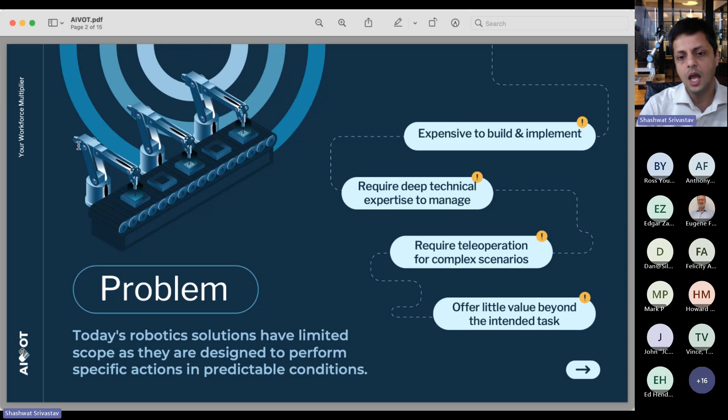If there's any change in requirements, like change in the workflow or the object that has to be manipulated, re-implementation has to be done for the automation. Often the workspace has to be modified too, so you have to bring in a conveyor belt and those types of things to make automation work. It's not flexible in that sense.

What we've done is built an integrated robotic end-to-end solution that can perform unstructured and complex tasks in dynamic and unpredictable environments. We've built a form factor which includes the hardware and software as an integrated thing, so it can just be deployed out-of-box by layperson operators and made to work in any situation.

However, the core value proposition that we have is in our software, the AI-based software, and the software itself is hardware agnostic. Basically, it can be made to work on any off-the-shelf third-party commercial robotic systems like industrial arms, cobots, AMRs, unmanned vehicles, and so forth.

The software works by integrating the configuration of the hardware, and then it's able to talk to the low-level motor commands with the hardware and bring in the overall intelligence to the system. We've shown a few examples of how that's done in our deployed systems, and I'll talk about that a bit too.

Let me interrupt here for just a second. Ed Hendricks, did you have something? It looked like you unmuted, did you have a question? No, I do not have a question. Okay, just wanted to check to make sure.

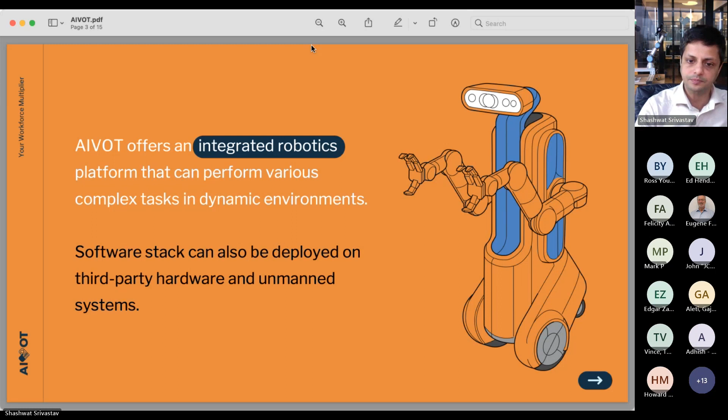So I'll dive a bit deeper into how the software system works. Basically, out of the box, it's a vision-based system, so it can detect and track objects in real time. It uses a variety of deep learning models inside the system as building blocks.

Out of the box, the robot comes pre-trained with identification of common objects, so it understands what a table, chair, glass, all these objects mean. It comes with a natural understanding of the language and description people use to define various tasks of a workflow. It also comes with an ability to perform basic everyday actions - like, what does lifting mean? What does grasping or placing something on top of another thing mean? How do those things work? So it has an understanding of the ability to manipulate rigid objects.

So basically, just out of the box, I can say to the robot: pick up the green box and place it inside the packet, and it would be able to do that. But oftentimes people have unique objects and tasks they want to automate. In that case, they can show the object to the robot and say, I'm going to teach you about this new object.

Let's say we want to measure the radioactivity level of something. We can say this is the object I want you to learn about, and show the object in front of the robot so it can see its shape and texture. Then you can say this is a special point on the object, and show that this is the button I want you to consider. You can name all these concepts - this is the start button, this is the measuring instrument - and also show it a pose, that to measure, you have to bring the object into this pose relative to another object, and it would understand that.

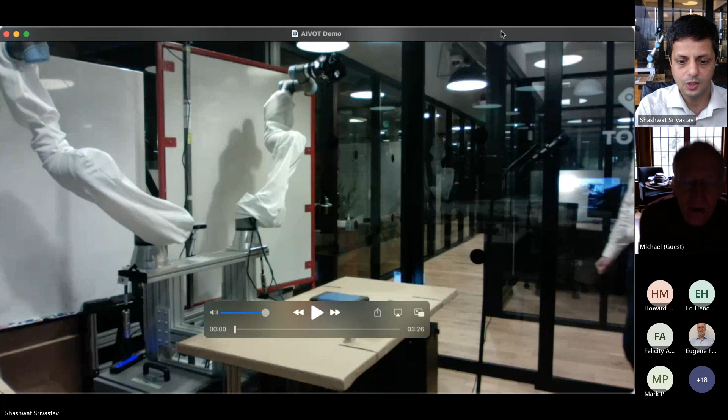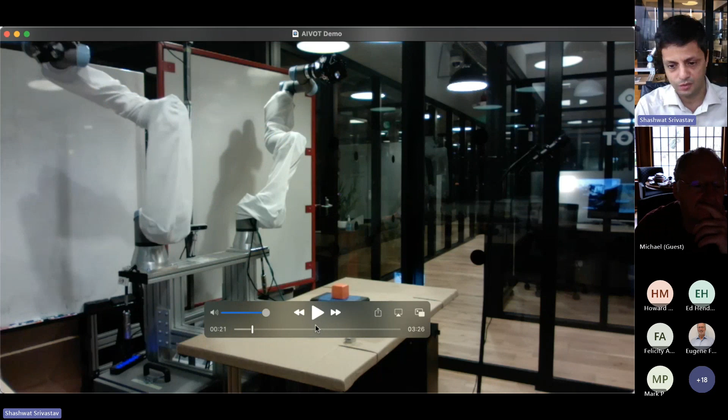So this was just a toy example recorded earlier to show the concept. This is out of the robot. It has no training on these objects, so it's just working off its common understanding of different things, and it's able to follow those instructions and perform those tasks. Between the spoken instructions and the action, there's a pause of 20-30 seconds while it processes and creates a plan. In this video, that pause is cut out.

That was an improvement: after picking up the orange cube, move it 10 centimeters to the right and 10 centimeters up before the next step. So the interaction is more conversational with the robot - you can give it feedback. If you use something the robot doesn't understand at all, it can say 'I don't understand this, can you explain?' And that's how you build up and refine the skill as it goes on.

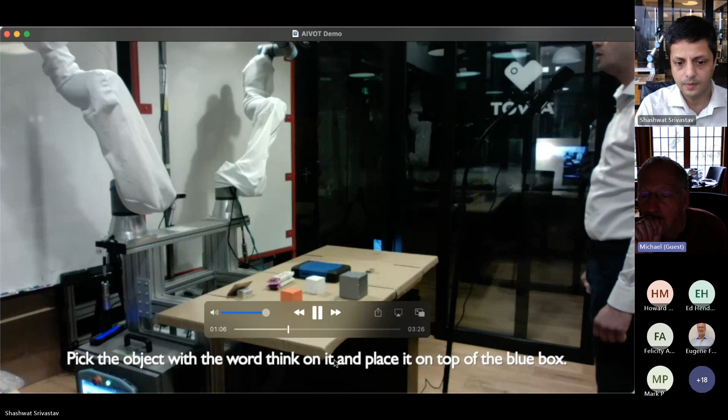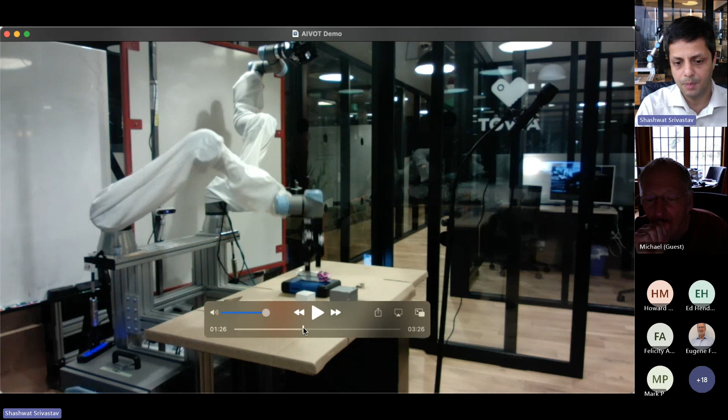Pick up the object with the word 'think' on it and place it on top of the blue box. Okay, it can - so this is a 'think' bar, but it can read the words and make sense out of it and take decisions on that basis too.

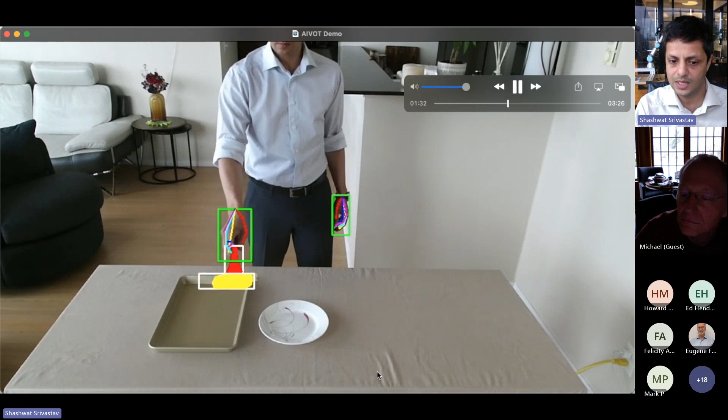The other thing I wanted to show was learning by demonstration - how you show the flow. Here the robot is tracking the human hand, and once it comes in contact with something and starts moving that object, it begins tracking that object that was moved. The robot has 3D cameras on it, so it can understand shape, pose, and those things too. If that object starts interacting with another object, it starts tracking those objects too, and in this way it builds up the whole context of the task that needs to be performed.

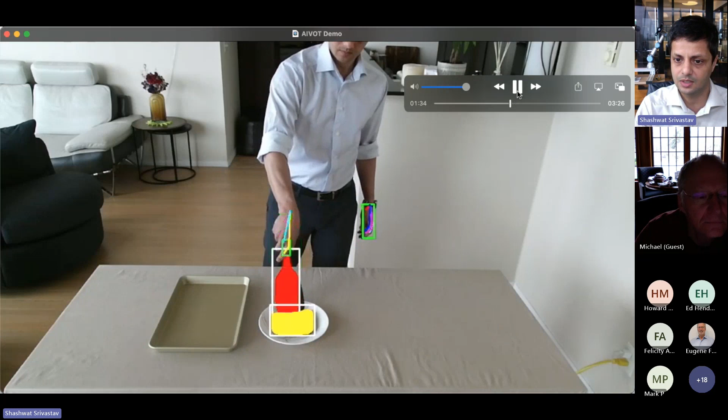Once that context is built up and it understands the task context, it can be given an environment where things are arranged differently, with other objects present, but it would still recognize the objects that were in the original task description, build up the context, and perform that action.

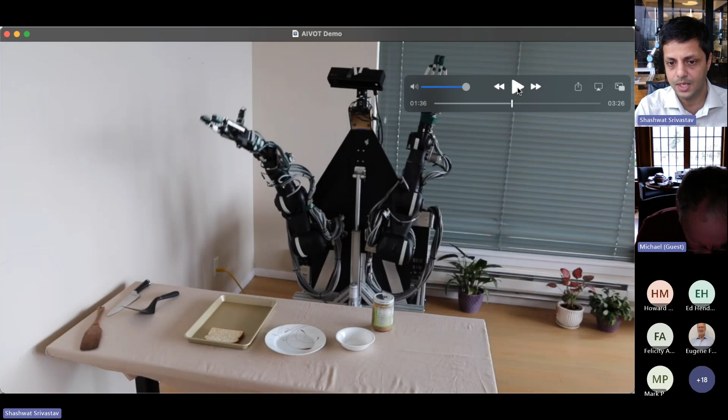This particular robot was a prototype that we had built earlier - this is our own hardware prototype. I'll talk about hardware later and explain why we built this robot. But as Eugene was mentioning, things can move around, and it can react to that on the fly and perform the action.

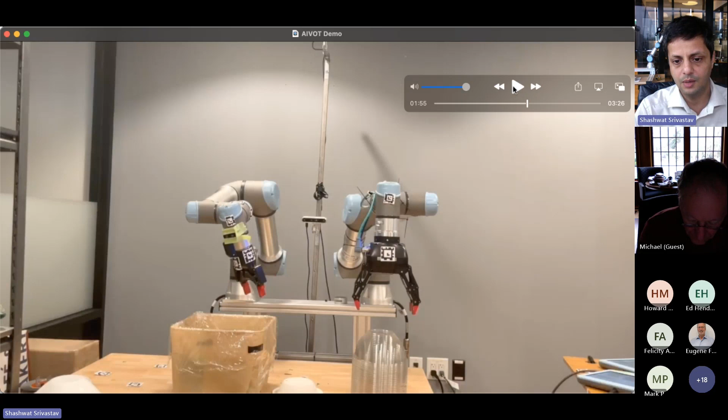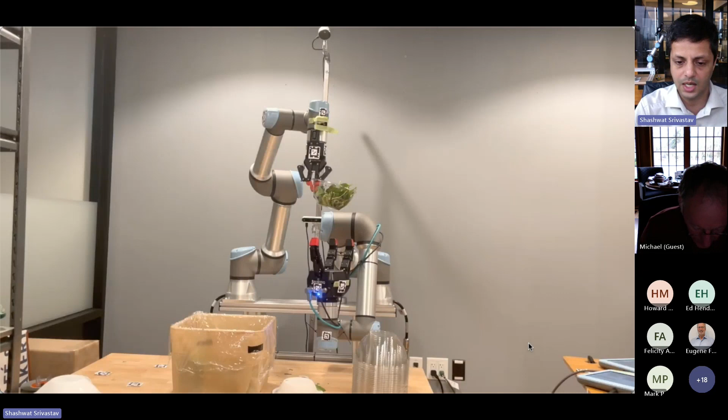Thank you. So we had deployed the robot in a commercial kitchen in the Pacific Northwest at Evergreens, a chain of 32 restaurants. They had to-go salad boxes, and the robot did a pilot to pack the to-go boxes, picking up bowls from a stack one by one and packing the greens into those bowls. It's completely unstructured - the stack of bowls moves as it's being manipulated, but the robot is still able to adjust to that, and humans pick up the bowl and arrange the toppings on top.

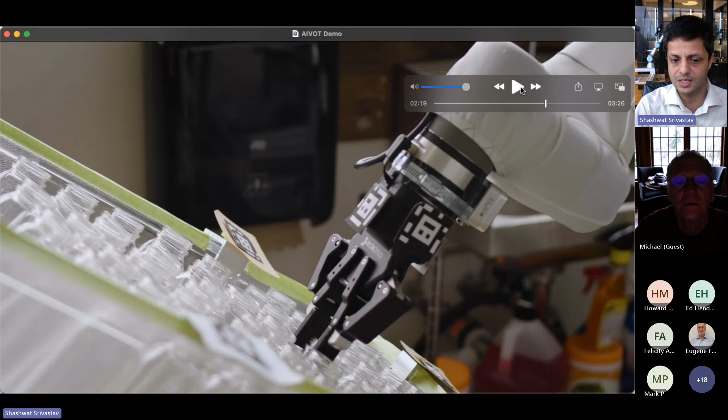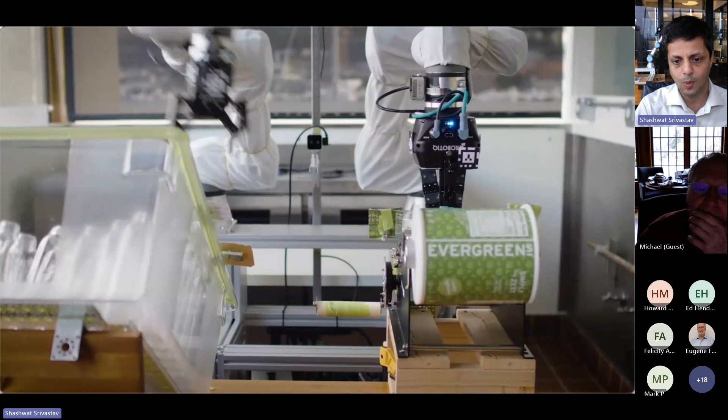Another task we automated for them was the production of beverage bottles. A person brings in a tray of bottles, which are all unstructured - if one bottle is picked up, others move. But the robot detects bottles and picks them one by one from the box, and uses the labeling machine to put the label on the bottle. This required some precise coordination for it to be able to do that, and it read the text on the label to know when to stop labeling.

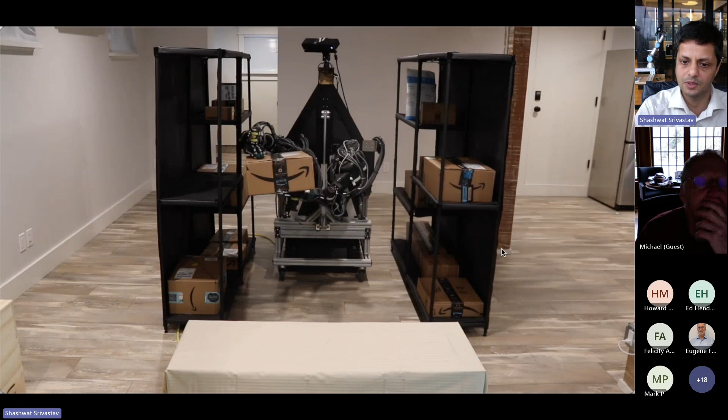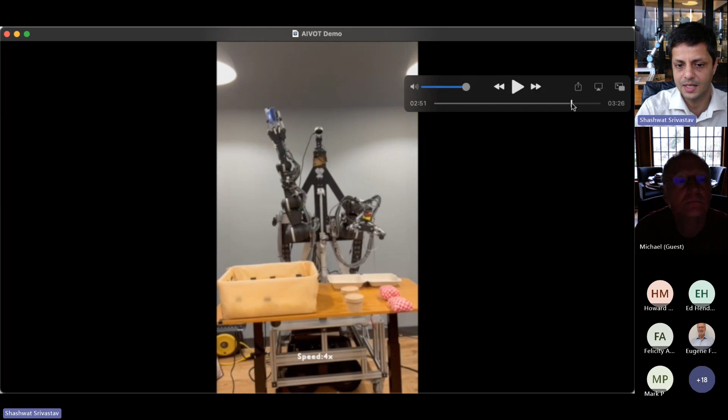Some other videos we've done are more of our demo videos inside our office to show the capability of the system itself, where it can go back and forth and fetch, pick up and move boxes. Sorry, that video was cut short, but in the original video on our website, you see it also goes back and forth and picks up different shapes and sizes of objects, like envelopes and small boxes. It's not a precise back-and-forth motion, but it's able to locate those objects and figure out how to pick them up and bring them to the front.

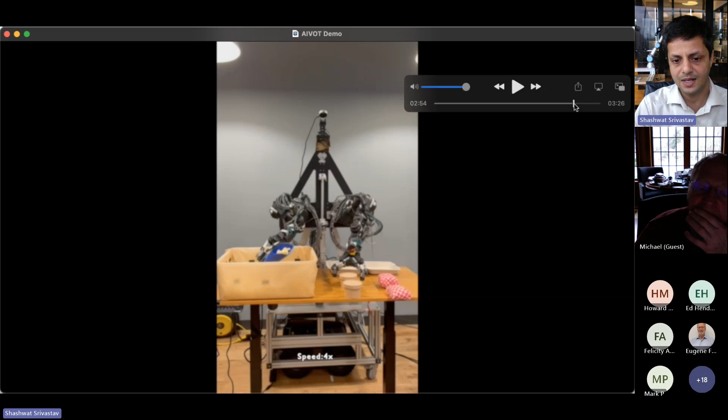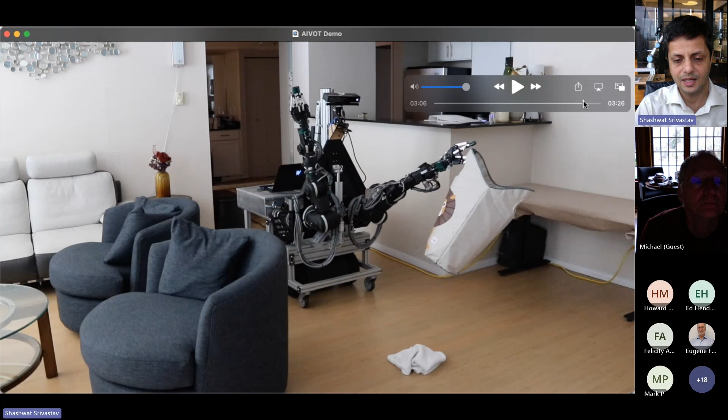We had done some other targets to do, like to-go boxes, packing, again to show the versatility. And this is an example where we said go along the floor and pick up the toys and put them in the bag, and it's able to explore and find objects on the floor and pick them up.

So are you using tactile sensors in the fingers to be able to prevent from crushing and sensing the objects that you're touching and grabbing? How are you handling that?

Yeah, so we haven't done that yet, but that is a plan. That is one of the things to integrate in these robots. Basically what we do right now is we have various multiple levels of force, and the operator can say start with the light grasp, or this object is heavy, use a tighter grasp. So we require more operator input right now, but that is in the plans to develop.

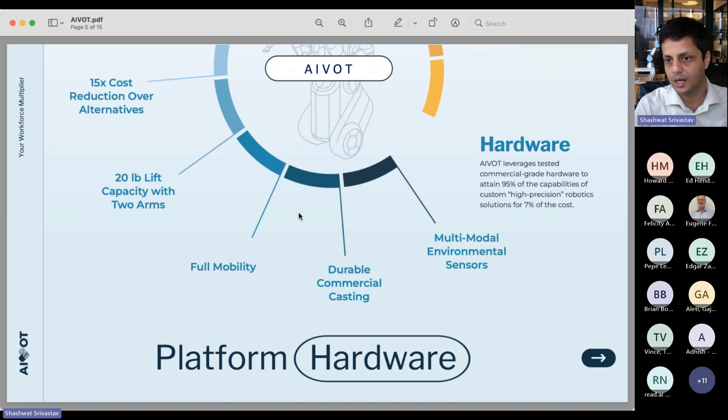So the prototype that I showed in the video, we developed to show that the task can be accomplished using that design principle, and the hardware cost reduces to one-fifteenth of the one available in the market using those principles. So we've done the prototype development, but we haven't started production of that hardware. We wait for our pilots to get over before we do the final design for that.

So on the whole, the value propositions that we have for customers is the ease of automation, that they can deploy the robot using natural interfaces, the task complexity, that because of vision AI it can do more complex tasks, and increased autonomy, that no one has to teleoperate for more complex scenarios, and the robot would be able to go and do things on their own.

So we want to focus on defense. Can I stop you here again? I don't know if you're going to get into this, but are you going to cover the different products that you offer? Basically, you don't just offer the robot with the software, you offer the software separately, correct? Yeah. So we have an offering.

We've started - our software development is complete, and we have started putting that into production. So we offer a software-only offering where we can deploy our software on any hardware that is suitable, and we lease that out for $960 per month per robot, and that's the only offering we have right now. That is ready for customer deployment, and hardware would come in later, after a year or so.

Thank you. And that also offers us flexibility, because in many defense scenarios, some robots have to lift up 100 pounds, and the normal sized robots are not going to be good enough for that. But we can put up industrial arms which are huge enough to lift 100 pounds, manufactured by established players like Fanuc, and we can put our software on top of it to add the intelligence aspect.

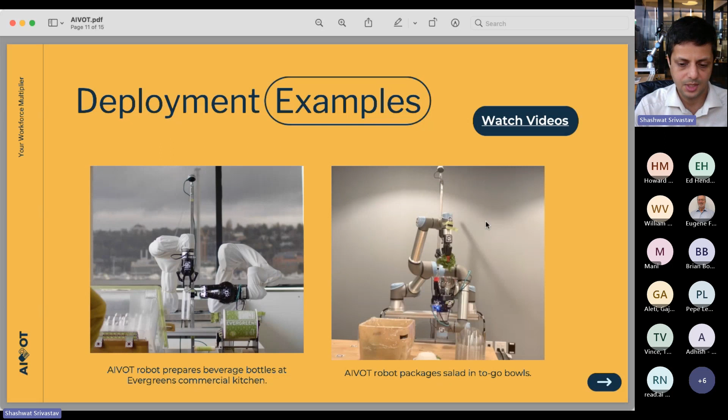We've done customer deployments, as shown mentioned in the Evergreens, where they were facing labor shortage issues, and the robot helped them in launching their beverage business. This was the video that I had shown. These are some of the other videos that we had seen for different use cases.

We have a background in B2B products, making them successful complex technology products, right from the start into the market. And I was VP of engineering at EMC and an early engineer at Microsoft Azure. So that's the background.

As I mentioned, our software development is complete. We offer software only as an option, ready to be deployed on robots in the field using off-the-shelf hardware components. We can configure the hardware based on use cases so that it's suitable. Once we've done a few pilots, we'll finalize our own hardware design and make it ready for production. After that, we'd be able to offer another option in addition to software only, which is the integrated robot.

This is my contact information, shashwat@ivot.com. I'd love to have more opportunities to collaborate on different projects and pilot opportunities. But that was the presentation, and we can move to questions and discussion.

Does anybody have any questions for AIVOT? I listened to everything. I'm just trying to remember if you said you were doing any current military work right now.